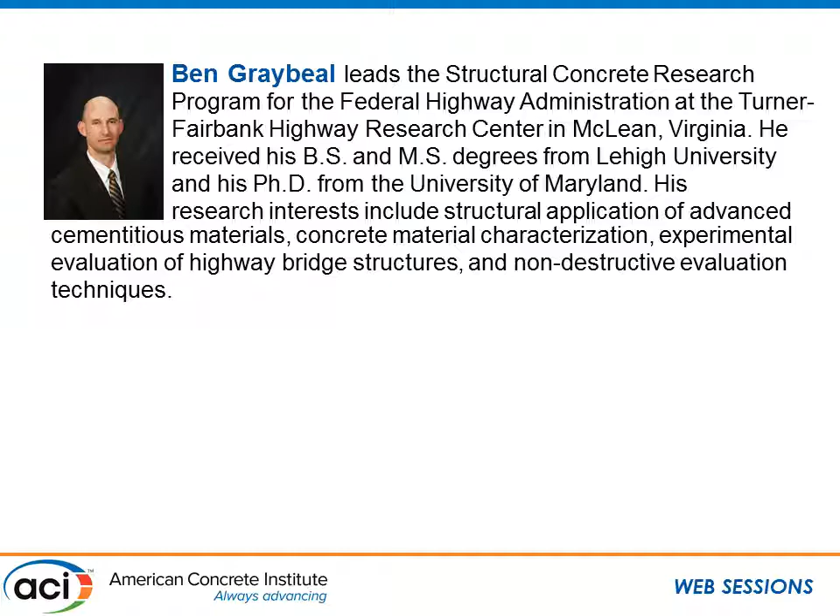Hello, good morning everybody. I welcome everybody to the ACI special session titled UHPC Innovations in Durability and Resiliency. So you see here in a short overview we have 5 presentations today. We will start off with Dr.

Graybeal from the Federal Highway Administration, talking about the material properties in terms of durability of UHPC and the difference to normal concrete. Then we have 2 presentations by Vic Perry, the second and the fourth one, providing us information of practical application of UHPC and seeing there the durability of this material.

Then we are being presented research results from the University Politecnico di Milano, and at the end we will hear some research effort and developments from the U.S. Army Corps engineers. I would like to welcome the first presenter, Dr. Benjamin Graybeal. He is the manager of the Structural Concrete Research Program at the Federal Highway Administration. Welcome, Dr. Graybeal, to the session.

It's a pleasure to be here this morning, and I'm glad that everybody stuck around till Wednesday and got up early to come hear a little more about UHPC. So, durability. I guess it's good to talk about durability. It's been a while since I've had the chance to talk about durability with UHPC, although I do talk about UHPC quite a lot.

It's probably the overlooked property. With UHPC, it is ultra-high performance concrete. It's not ultra-high strength concrete. It's not ultra-high ductility concrete. It is ultra-high performance concrete. So there are a lot of very impressive durability properties, and that is one of the key things we can key on when we're looking at applications for UHPC.

So I lead structural concrete research for Federal Highway, and one of our research focal areas right now, and really for the past decade or so, has been on UHPC and how we can best make it appropriate for addressing some of our needs in the highway transportation sector.

So UHPC. The French recently published a design guide for UHPC, and in that design guide, it's not just...

Am I not loud enough? No. Should I wander? Okay, I'll stand over here. Thank you.

So they recently published a design guide on UHPC, and it's got chapters on structural design. It also has talk about sustainability and some talk about durability. And chapter 3 is about durability, and it's got this statement in there. And I think it's pretty important to recognize this, because this is really what's fundamentally different about UHPC as compared to conventional concretes. And it basically says that the durability is very good, and it would project very long life cycles for structures, and it's going to be explained by their particular porous structure characterized by an absence of capillary porosity and non-interconnected porosity on a very small scale.

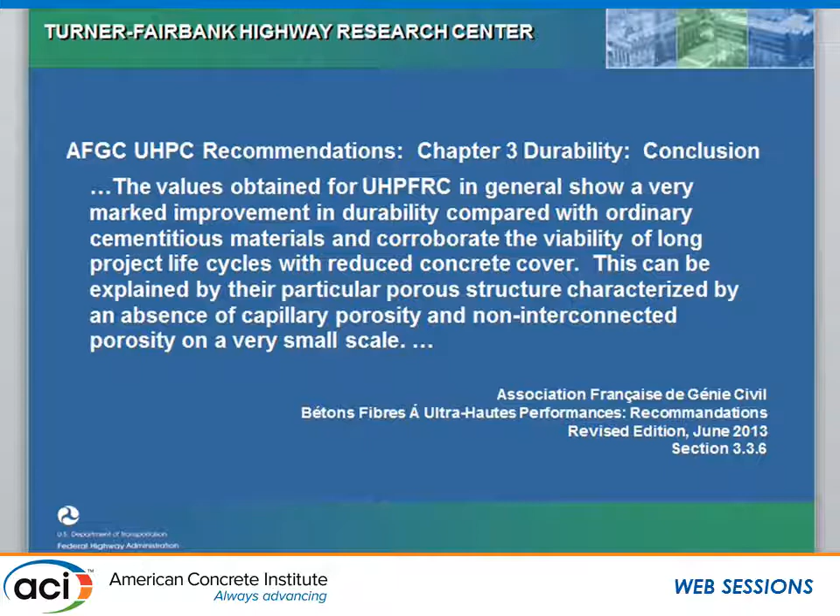A little more background. Federal Highway recently published a state-of-the-art report on UHPC, and it's got chapters on lots of different things. I brought a couple copies, and I don't want to carry it back to Washington, so somebody's going to get these before we're done here. Published back in June, it talks about a lot of things: mix designs, material properties, design guides, deployments, and also durability. So I will be speaking to some of the information in there, and it contains obviously lots of information beyond what we've done at Federal Highway.

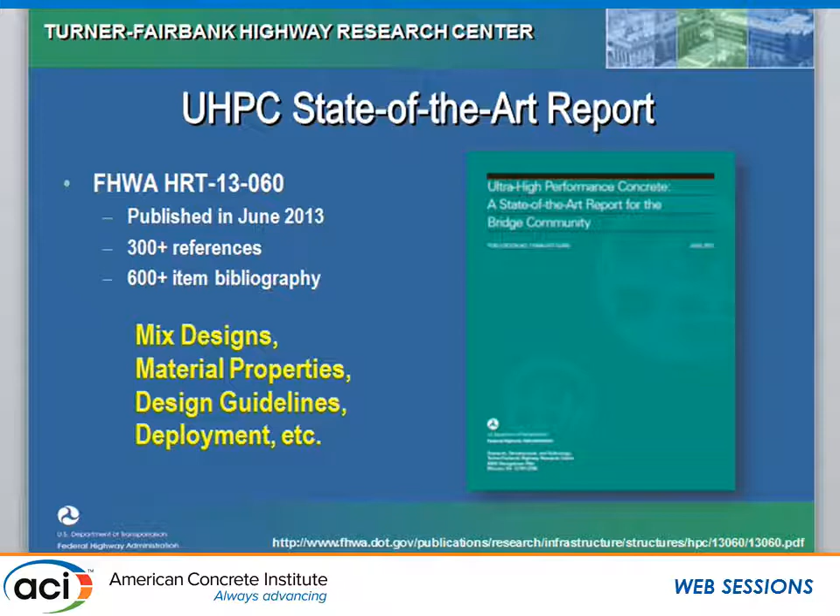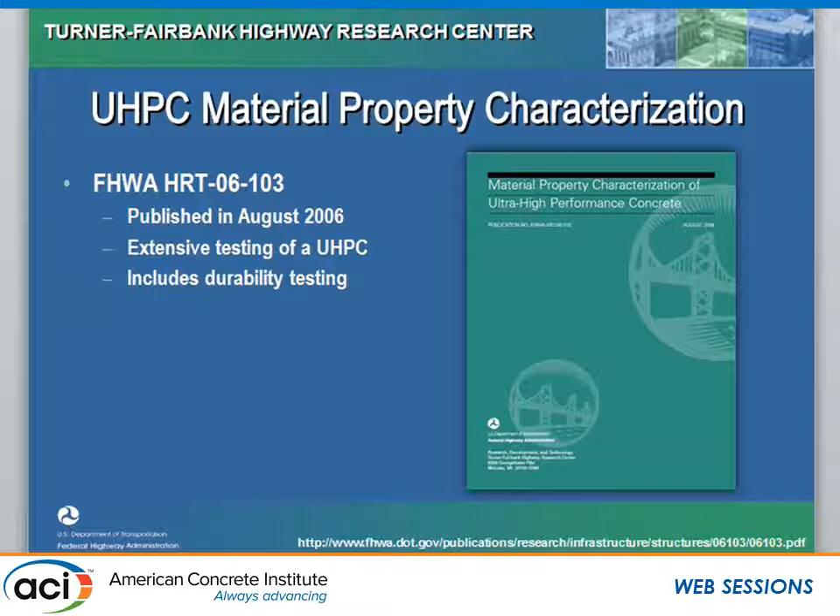There's more than 300 references, a 600-item bibliography there. But what I'm mostly going to be talking about in this presentation is a lot of information that came out of this report. This was published in 2006 - it's work we did in the 2003, 4, 5 time frame, looking at characterizing UHPC, including lots of durability tests. Also a paper that I published in the Journal of Materials in Civil Engineering on the durability of UHPC, that was back in 2007.

A report that we published earlier this year on grout material characterization. We're looking at using UHPCs as grouts in field cast connections between prefabricated elements. We looked at lots of different grouts and compared their performance, both mechanically as well as from a durability standpoint. So I'm going to talk a little bit about this.

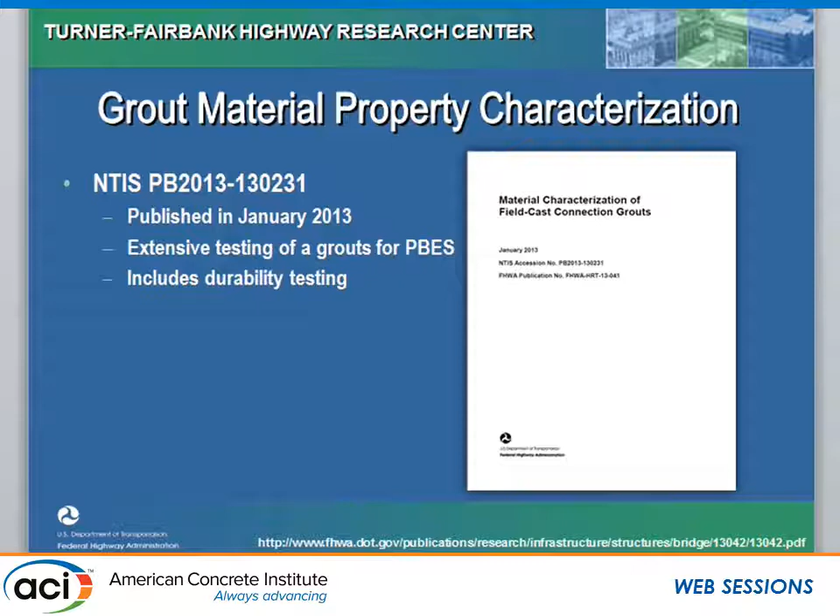In terms of some of the results, the first one I'll talk about is rapid chloride. In the bridge and highway sector, we talk a lot about the rapid chloride test, probably because it's easy, not because it's perfect. It's C1202, and you basically pass an electrical charge through a slice of concrete, a 2-inch thick slice, 4-inch diameter, and see how much current passes. It's an indirect measure of the charge passing ability, which can give an indication of the resistance to chloride permeation. Values at the bottom show a rating from negligible up to high.

Conventional concretes that you might run into these days are probably in the moderate range. Sometimes we specify things that are in the low range. You can see the values there with some UHPC tests that were done a little longer ago and more recently. It does depend on how you cure the material, but your values are in the very low to negligible range. So pretty good performance on the UHPC.

Other people have run similar tests. These are tests that we did at Federal Highway. If I can real quickly pull this out.

Also on this topic of permeability and permeation, people have done the type of permeability tests where you actually pond something and check the permeability. You look at diffusion coefficients, and the numbers for UHPC are very low—there might be in the range of 2 times 10 to the minus 13th meters squared per second. People have also done work under pressure, up to more than 200 psi of sustained pressure on a sample of UHPC, to see how far the liquid would permeate in.

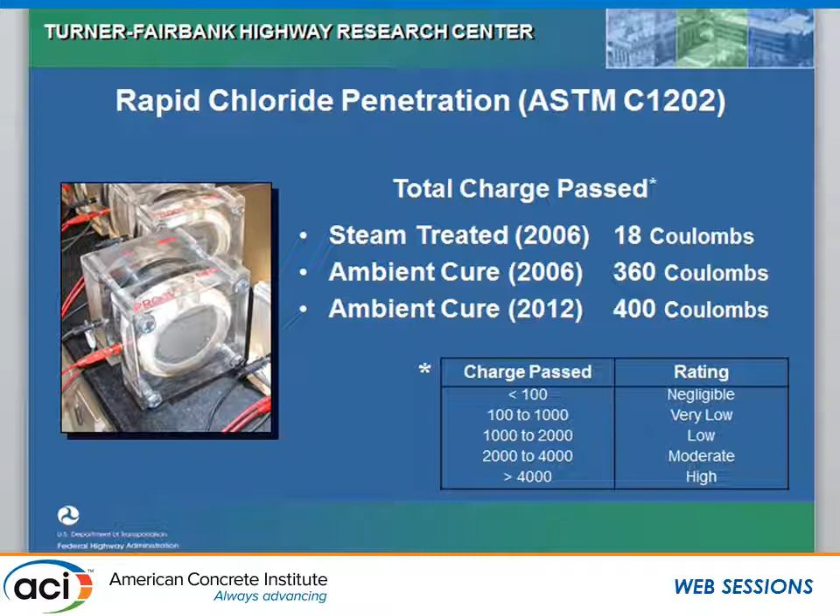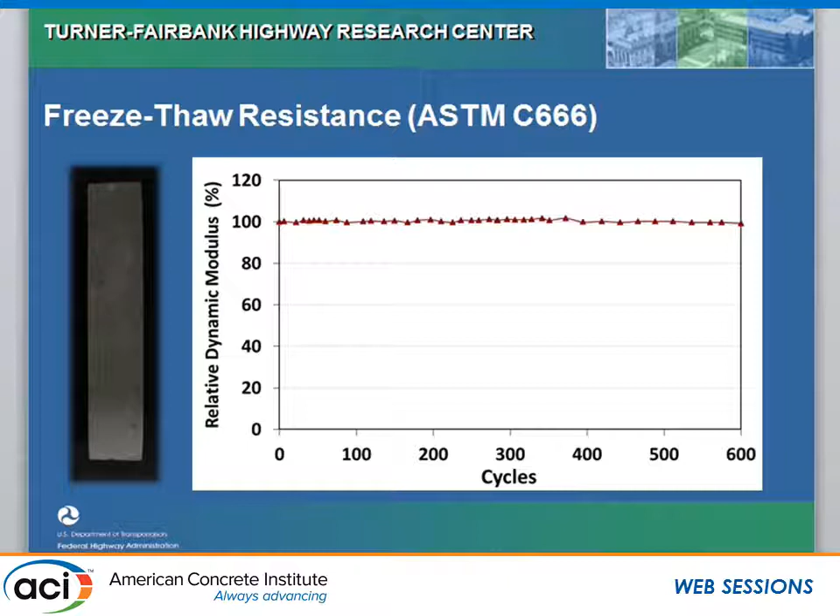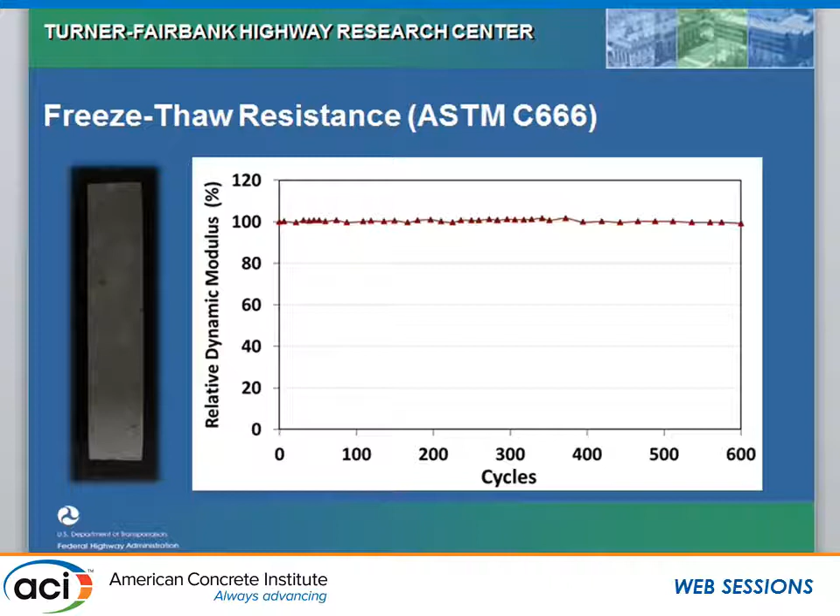Frequently, a conventional concrete that doesn't have a good air void structure would fail well before the completion of 300 cycles. But in this set of tests, we said 300 wasn't enough—let's go to 600, let's see if something happens. And we did. We still stayed right around 100 for our relative dynamic modulus on the resonant frequency. So very good performance; we really didn't see any degradation with this UHPC.

Some more recent tests and some older tests that we've run on different curing conditions show the numbers all staying around 100%. The one that went up to 112%—if you don't saturate the specimen before you start the test, you can actually see an increase in freeze-thaw resistance, or at least an apparent increase. It's not really getting better because of the freezing; it's getting better because some water's getting in and hydrating some of the unhydrated cement inside the matrix, so your stiffness actually goes up a little bit, and so does your dynamic modulus.

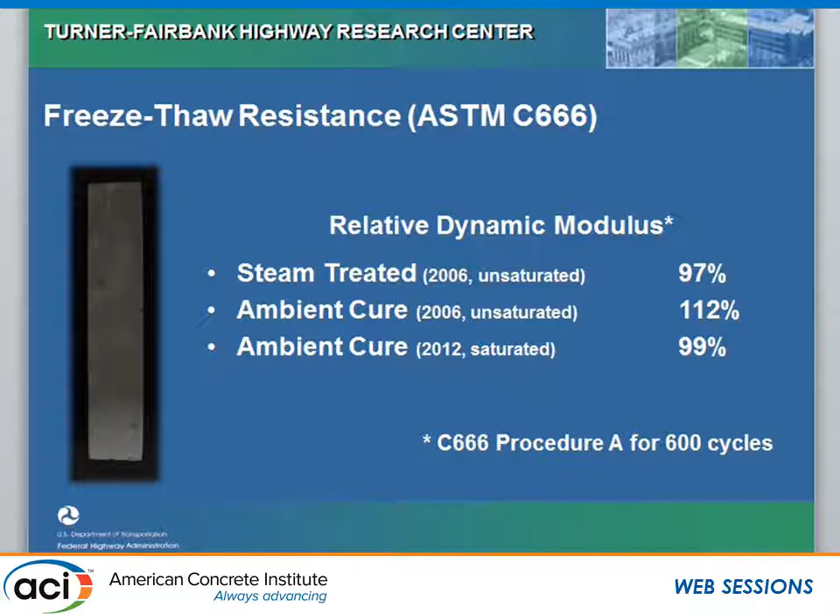Scaling resistance, ASTM C672—some tests we ran on a slab of UHPC. You can see the one on the right is wet compared to dry on the left, but other than that it doesn't look much different. This is a qualitative test where you look at the surface condition, and we basically saw no scaling after the completion of the test. So good performance there.

Some other people have looked at this, running similar tests, as well as some tests that are more standard in Europe. I'll point out that Schmidt et al. ran a test on scaling, more of a quantitative test, and looked at the volume that was scaled—it was less than 10% of the acceptable limit for a concrete after the completion of the test, about 7% of the acceptable limit. So very good performance on a German test for scaling.

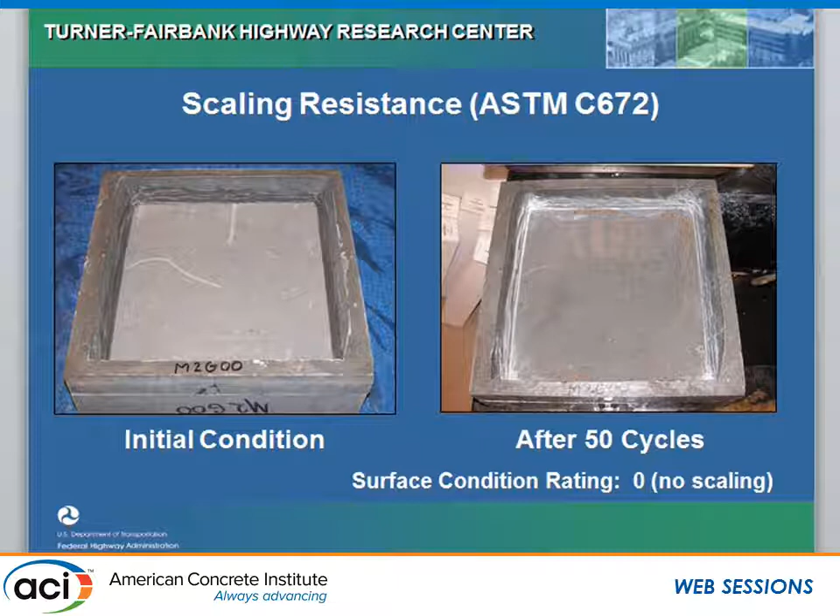Abrasion resistance is a little different than the water permeation type tests—this looks at the abrasion resistance of the surface. ASTM C944 is one abrasion test that's out there. This is one we ran at Federal Highway, and we found pretty good results. It changes a little depending on the curing treatment you apply, but really very little abrasion. I'll point out that this particular UHPC is not one with an extra hard aggregate designed for exceptional abrasion resistance—it's just a run-of-the-mill available UHPC and how it performed in an abrasion resistance test.

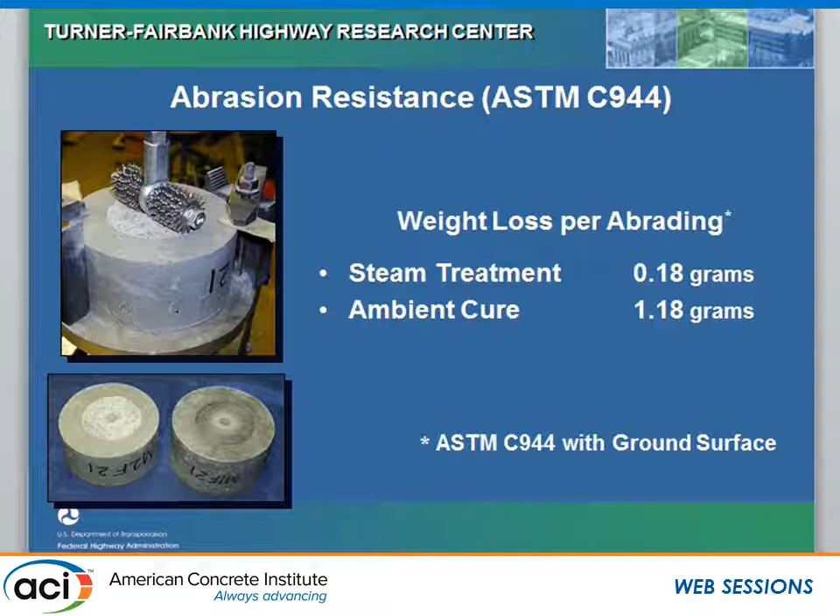One more topic, alkali silica reaction. There was a question of what happens under ASR type conditions. We ran these tests, and for ASTM C1260, if you're less than 0.1% expansion, it's considered innocuous, and we got numbers that are basically zero. So it wasn't expanding under these very aggressive conditions under C1260, where it's a very aggressive solution at elevated temperature. Good performance there.

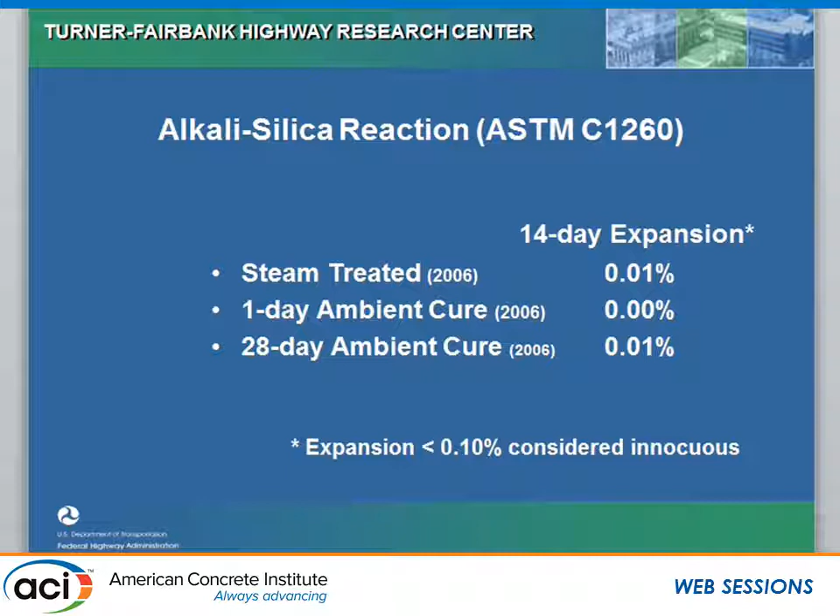So the durability is pretty good. I'll point out there's been work on some other topics. There's been work on fire resistance of UHPC, and it can be good, but you do have to do some work to ensure your fiber content is appropriate to give you the right fire performance. You might mix your fibers, a PVA type fiber maybe, or a plastic type fiber, with steel fibers.

Other work's been done on marine exposure in severe conditions. For those familiar with Treat Island, Maine, it's freezing and thawing in a tidal zone, and there are some UHPC samples that have been up there for more than 15 years and have been shown to perform very well in that aggressive environment.

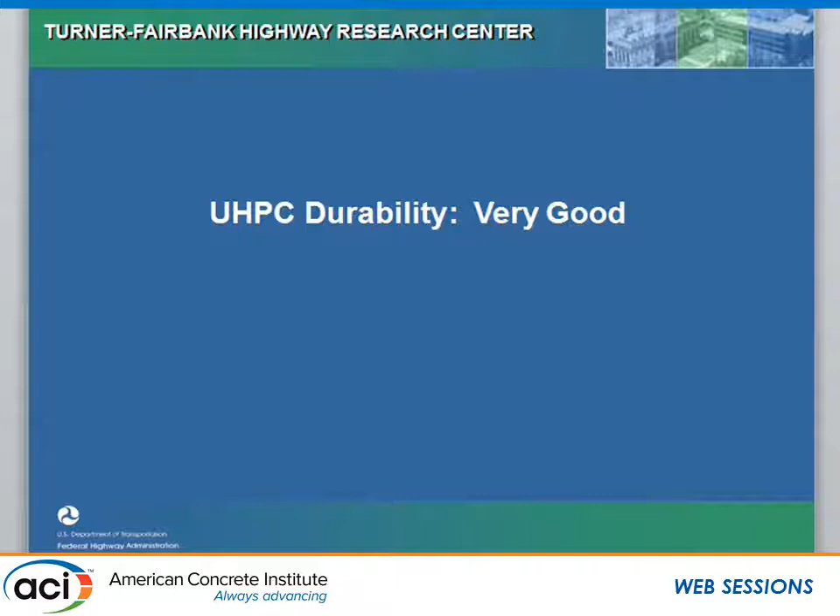Sulfate resistance—some testing's been done on that, and testing on carbonation. So there has been a good bit of work on durability of UHPC, and really the answer is that the durability seems to be very good under the sort of conditions that we normally expect to use concrete. So it's pretty good concrete.

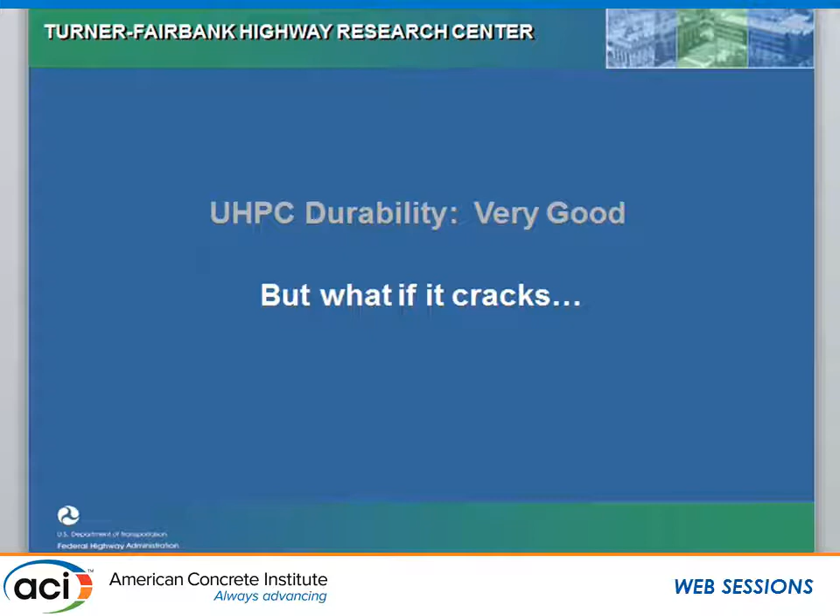But what if it cracks? A lot of the tests we run on concrete are bulk testing of the material—we look at the concrete between the cracks, and we know that concrete sometimes does crack. So there's a question of, in UHPC, what if it cracks? How does that affect the durability? There's been less work on this topic, but some has investigated what the performance might be if you move into a crack condition.

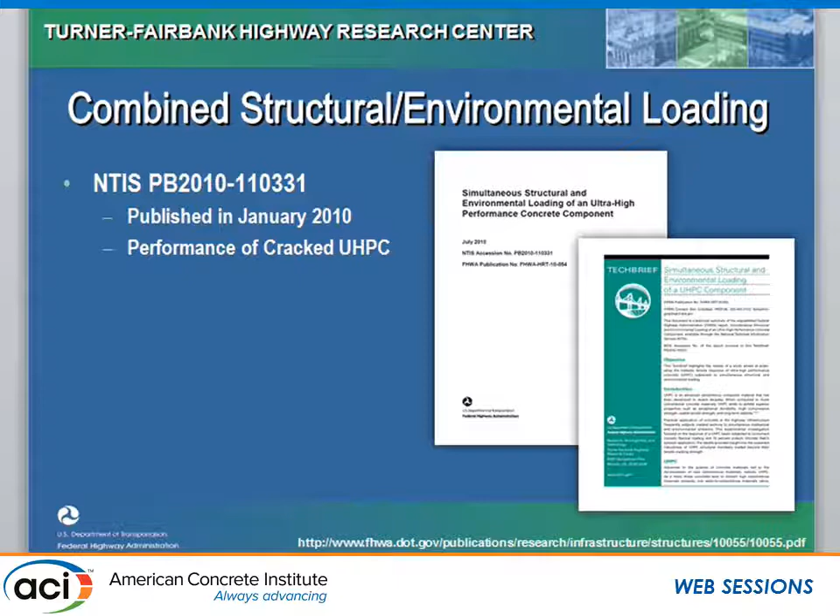We did a study at Federal Highway on combined environmental and structural loading. We were basically cracking the UHPC while applying structural loads, and checking how the structural response changed under the aggressive condition. This is a report published in 2010 that's available, and I can help anyone find any of these reports I've talked about.

Here's basically what we did in this test program. We had a 16-foot long beam with 4-point loading, so there's a constant moment region in the center. You can see we're pushing down into a sponge of salt water—this is that sponge. It was a cyclic loading test. It ran for 6 months, and every 30 seconds or so the actuators would engage, pushing down the specimen until it squeezed the sponge, and the sponge squeezed the salt water up into the bottom flange of the beam. So that's what you can see here.

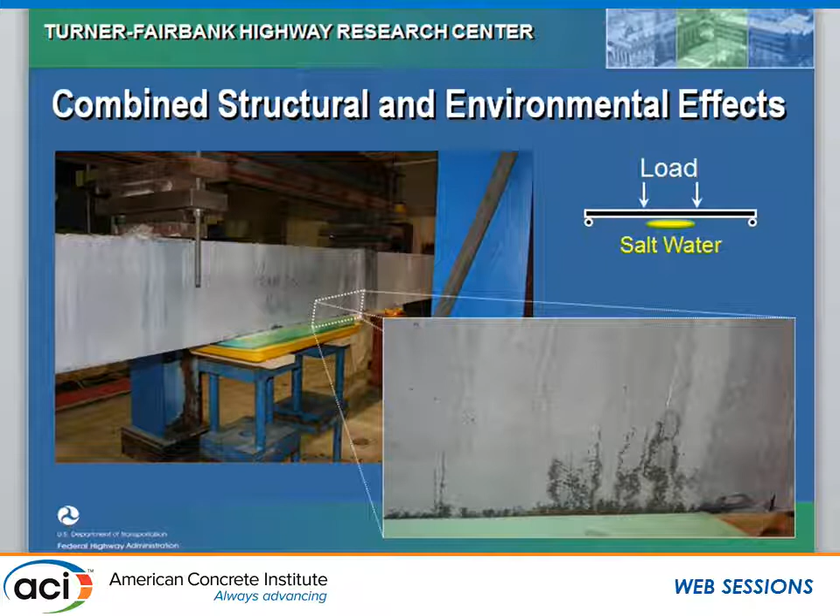This is when we just started the test, and the salt water—very high concentration, about a 15% solution—was starting to push up, wetting the bottom flange. Every cycle was beyond the cracking limit, so on the first cycle we ran, a series of very closely spaced cracks occurred, and then for 6 months we continued to push on the beam in that condition. We were looking at whether our flexural resistance degrades if you're in an aggressive environment like that.

So if you look here at this picture, you can see some of these cracks, and the salt seems to be migrating up the cracks. You might think, oh, that's not so good—we've got a steel fiber reinforced UHPC with salt in the cracks, and that could present some degradation. But what you need to recognize is that cracks in UHPC are very tight. It's generally a strain hardening cementitious composite material, so you might have around 2% steel fibers in there to get that tensile structural performance.

What you get with that is very closely spaced, very tight cracks, and I'll talk more about that in a second from another study we did. So basically, you are seeing an indication of where the cracks are, but that doesn't mean the salt is completely through the cross-section on those cracks. That may just mean that on the very surface, where the cracks are widest because there's least restraint, the salt water seems to be migrating up the edge of the cracks there.

Throughout the 6 months of loading, we honestly expected we would see some degradation in the performance, but in our tests we didn't. The flexural performance remained the same throughout the entire time we ran the test. After 6 months, we had to give up—we had other things we needed to test. But we took the specimen out because we thought, well, maybe there's been some local degradation.

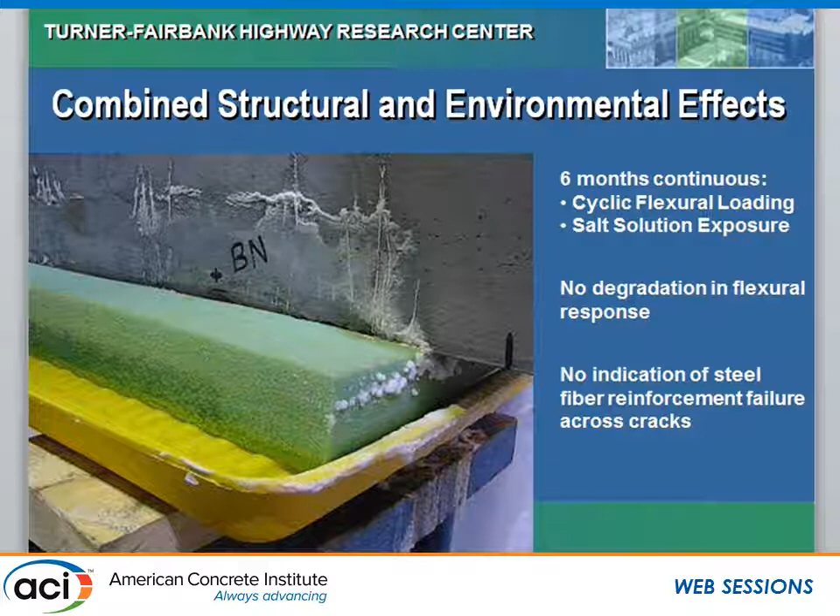So this is the bottom flange of the beam. It's a 6-inch wide beam. So imagine you cut off the bottom 1 inch of that beam in the constant moment region where you're pressing on that sponge. That's what we did. Then we took that 6-inch piece and cut it into a 2-inch wide piece, so what you have is a 1-inch by 2-inch piece cross-section, and then sort of this stick here.

Then we grabbed it and we pulled it. We thought, okay, this is the most severely tested region—it had the highest tensile strains, it was right on that saltwater sponge. We thought, if you look at this real closely, you can see some of the lines where some of those cracks were. We thought, okay, we must have somehow decreased the tensile response across those cracks. So let's pull on it and let's expect that it's going to fail where the fibers bridge those cracks.

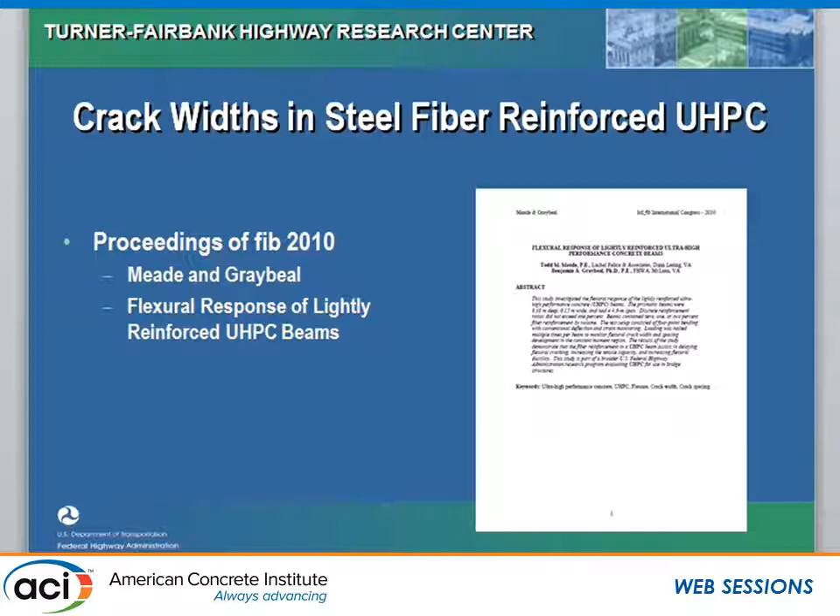We published a paper at the Proceedings of FIB in 2010, the FIB that was in Washington, D.C. We were looking at flexural response of lightly reinforced UHPC beams, and part of that was looking at crack widths in UHPC. This is basically the same test setup as the test I was just talking about: a 6-inch wide, 16-foot long beam in 4-point bending.

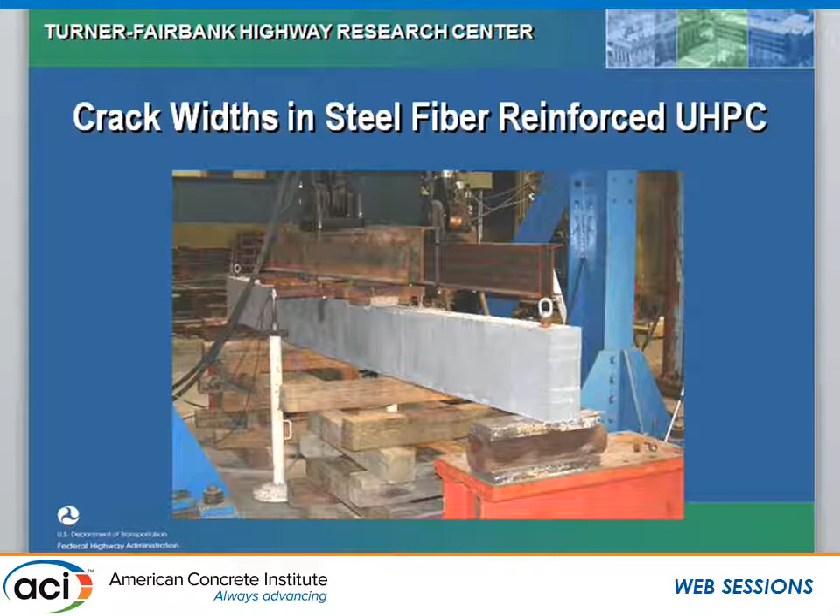We were loading those beams to failure and monitoring the crack widths during the test. We periodically stopped during the test, counted up the cracks, and measured how wide they were.

Basically what we found was, in 2% steel fiber reinforced UHPC, our mean crack widths were about 0.006 millimeters. In 1% steel fiber reinforced UHPC, it's about 0.017 millimeters, and that's pretty small.

Take a microscope at 200x, this is what one of those cracks would look like. Blow that up to 800x, here's what it looks like. So this is one that's 0.003 millimeters wide. Just to give you a sense, in normal concrete you might have cracks around 1/10 of a millimeter wide. So these cracks are very, very tight.

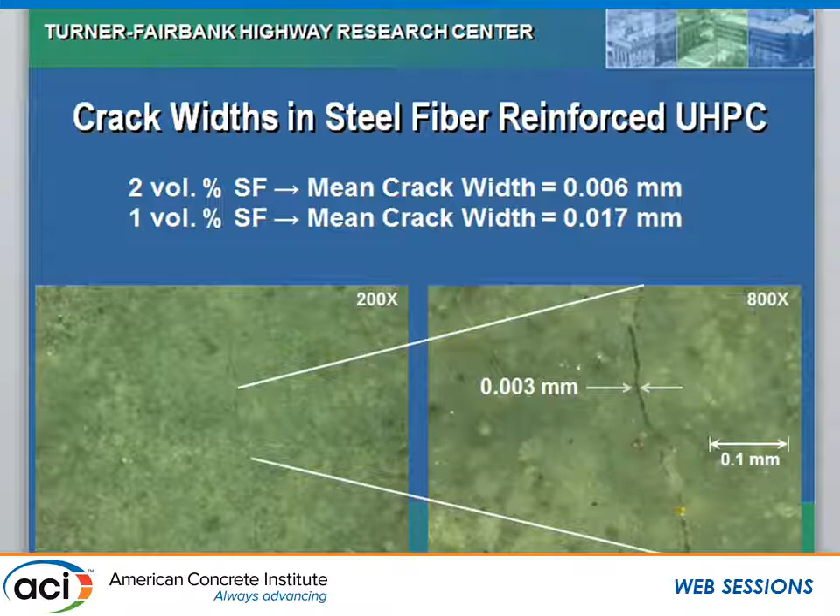And that obviously makes it difficult for aggressive agents to get inside the UHPC. All right, so that's the quick coverage of durability and kind of what I know about durability of UHPC. I think I'll end there, but I'll be happy to take any questions if we've got time.

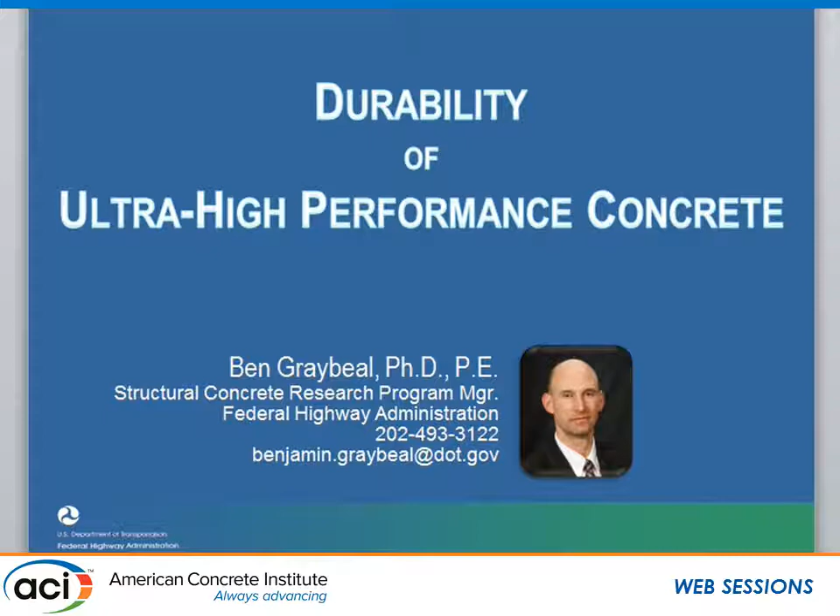I'm not sure you are involved, but is FHWA doing any fire resistance testing on ultra-high performance concrete compared to conventional concrete? We have not. I haven't been involved in any, but I'm aware of some. Traditionally what's done is you can get better performance, but with fire you need to have a way for the water to get out as it turns into steam. And the fact that UHPC has such low permeability, that could be an issue.

You use some sort of meltable fiber, and that allows some pathways or expansion locations for that water, and then you can get better performance.